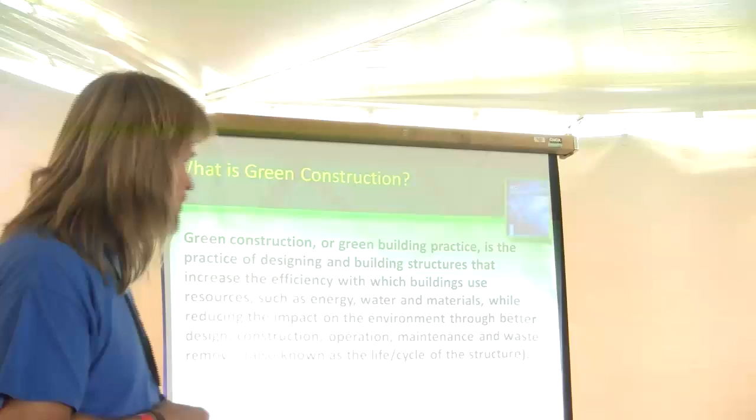Okay, and like I said, there's a handful of green building programs out there. What we're going to make reference to is the International Residential Code. The residential code is not adopted in every state in the United States, and in some states it's not adopted across the state. Like I live in Minnesota, it's adopted in Minnesota, but it's exempted in jurisdictions less than 2,500 people. Now in Wisconsin, for example, they have their homegrown building code. I believe, this is my opinion, that they'll probably be adopting the international codes in the near future.

But their provisions, when you look at them, they're really similar to what's in the IRC and the old International Building Code and Uniform Building Codes. Things just don't change that much. So if you're building locally, a lot of the same requirements.

So when people talk about building to code, is that actually building green? Building to code means that it's structurally sound, it's energy efficient, it's safe for the occupants, it's weather resistant. The things that the code has always covered. Now, does the building code cover sustainability, green construction? Some items in it might be green, but it doesn't actually have chapters referencing green or sustainability.

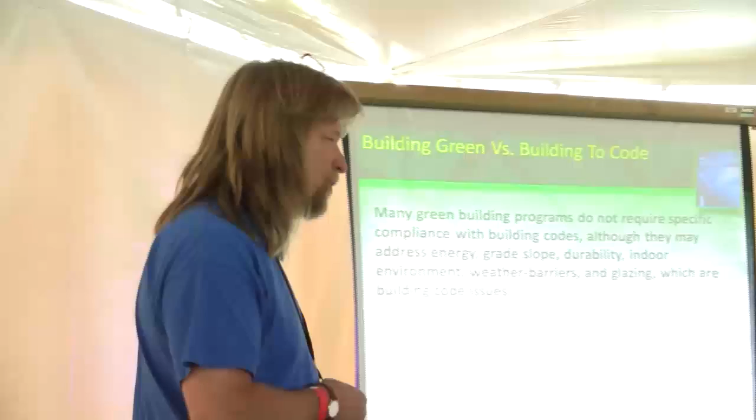But some of the green building programs, a little bit less to codes, more emphasis on durability, energy, life cycle, and we'll talk about the differences. So just because it's building green doesn't mean it's building to code. And I just mentioned this, a lot of green programs don't have specific references to code.

Okay, a lot of green building programs do base a lot of the information on particular building codes that we have in effect. That's probably good, because it's going to make it easier for the person building to that green building program to comply with the building code.

Okay, how can you use the green building program? A municipality could adopt one, or you as a homeowner, let's say you just want to build a better home with less impact on the environment. You could hire someone to design a LEED home for you, for example. That could be your choice. That's why I think a lot of us are here today, because we want to build better homes, we want to build them with less impact on the environment, more energy efficient.

A municipality could adopt it. I don't see this happening right now very often. What I have seen is in some states, they've adopted green building programs for a new development only. They'll have a development with 30 houses, and they'll say every one of these has to be a LEED Gold or a LEED whatever, and they'll make that the emphasis of the development.

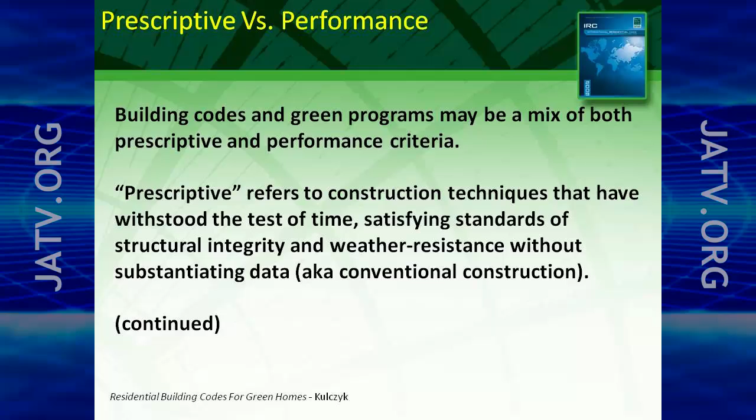I want to mention a couple of words, prescriptive and performance. Building codes are pretty much based on prescriptive criteria. Prescriptive means if you were going to build a foundation, let's say a full basement in your home, the building code's pretty much going to say if you have a certain depth of basement, maybe an 8-foot basement, and you're going to use a certain thickness of wall, like 12-inch block, and you have a certain type of soil up against it, sand or gravel or heavy clay, it's going to tell you what kind of steel you need in it. It's a prescriptive code, which makes it pretty easy if you're going to build within those parameters.

But what if you decide that on your basement, instead of building a concrete masonry or a poured concrete wall, you want to build with rammed earth or adobe or something else? Then it's kind of like, whoop, right out of the building code.

So how can we do that? Okay, so prescriptive is clear-cut limitations. I'll give you another example. If I wanted to put a house wrap on a house, whether it's felt paper or some house sheathing paper, the building code is real specific about what standard that paper should meet. And I'll talk a little bit more about that, where if you have innovative cladding materials and stuff, under prescriptive, they don't fit in so well. Okay, so how can we get those approved?

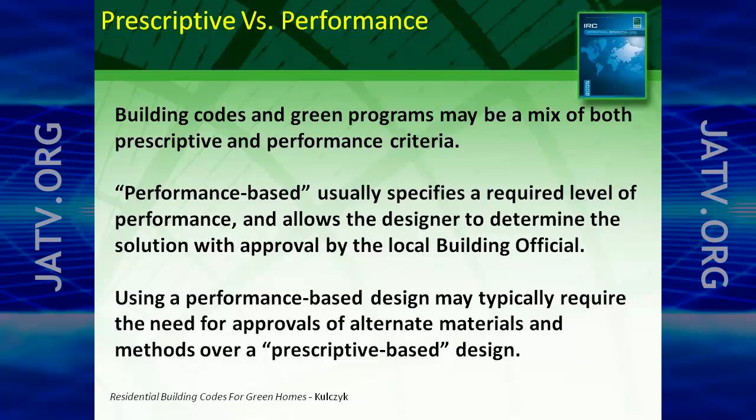So that's prescriptive. Performance-based codes is, let's say you come to somebody and say, I want to build under your code, but I want to build a geodesic dome with a glass roof, and I want to build the walls above grade out of straw bale and everything below grade out of rammed earth. They're going to look at you and go, what should we do with this? So that would be a performance-based.

Performance meaning that you need to provide some information, criteria, maybe some engineering data to the building official to show that what you're proposing meets an equivalency of what's in the code. That's performance building. In fact, same thing with energy code. Energy code is prescriptive, meaning, let's say you frame a wall with 2x6 studs in this area, it'll say 5.5 inches of fiberglass meeting an R value of 20, okay?

But a performance code would say, if you came to me with some new innovative insulation technology and you need to meet an R20, I as a building official would need to see something from you that gave me data that showed that you can meet that R20. Maybe you came to me and said, you know what, I'm gonna grind up sod and put it in this wall cavity, or maybe I'm going to make the whole wall out of sod. I would just say, do you have something that can verify that that's going to be an R value of 20?

Log home, same way. You want to build a log home? Can a log home meet the energy code? Absolutely. Can you determine the R value on a log based on R value per inch? Absolutely, you can do that. We'll talk a little bit about that. So prescriptive versus performance.

Okay, I want to just talk a little bit about the administrative authority. That means working with the building official, which sometimes may be challenging. Keep in mind, when I use the term building official, that usually means the person in charge, the administrative authority. A building inspector usually means personnel working for that person that actually does field inspections. Building inspectors, plumbing inspectors, mechanical inspectors. But the building official is the administrative authority.

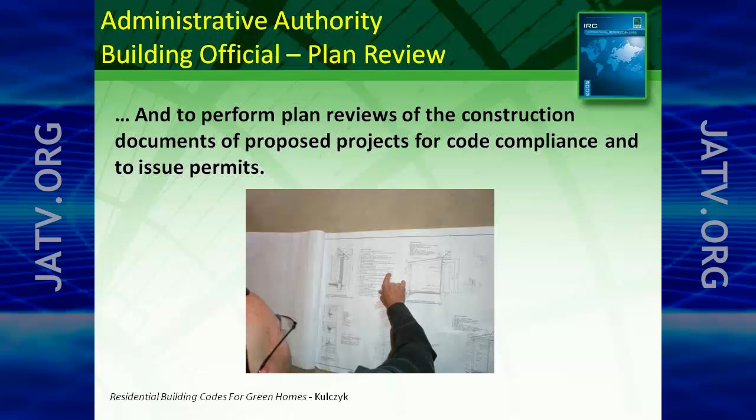So you got the building official, they hire building inspectors. They're also going to do a plan review. Keep in mind that one of the best things you can do when building a home is to give the building official the best set of plans you can and the best set of specifications you can.

Because I'll tell you, as in a past lifetime when I was a building inspector, people would walk in and say, I want to build a new house, and here's my plans, and I swear it looked like they did it during their lunch hour on paper napkins, and you go, I don't even know what you're building here. Is this a house or whatever?

And then the problem that creates is if you have very little detail on it and you actually get a building permit, or maybe you don't even get through the process, is that when you go to build it and you pull out those paper napkins and you say, well, here's what I want, and now you're building something that's really not on the plan, not enough detail, it's going to just slow that process down. And you don't want to be slowing your process down because you want to get this house built. You want to get it enclosed and weather tight and all that.

So the more detail, the better. And sometimes it sounds like a lot of work. You go, well, I just want to put this siding on. Yeah, what kind of siding? What brand? What model of siding? Can you give some siding specs to them?

Or I have some new innovative metal roof system. Contact the manufacturer of the metal roof and say, give me all the specs you have. I'm going to make it part of the submittal documents. So what if your submittal documents end up being about 100 pages? The more you can give up front, the easier it's going to make it.

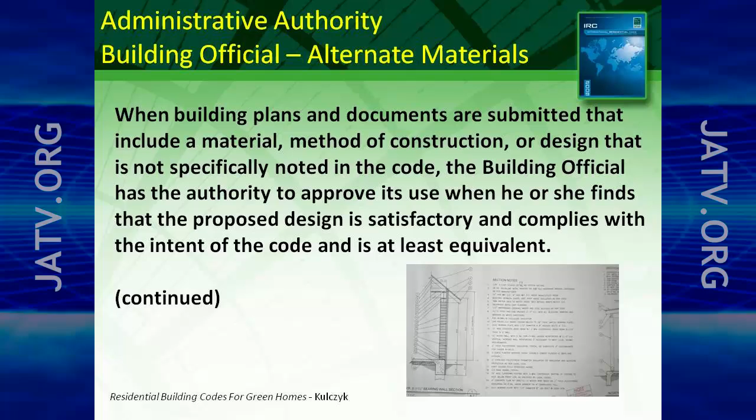Okay, alternate materials. I'm kind of talking about that. You have something that's a little different, whether it's your straw bale, rammed earth, adobe. Maybe you're building an Earthship. Anybody ever build an Earthship? I saw my first Earthship in Albuquerque a few months back, where you basically build a house out of whatever you have.

And I'm not kidding. This gentleman built a house where the foundation was out of 3,500 car tires. Laid flat, overlapped, packed with clay, some steel rods pounded in, 3 sides, south side facing toward the sun, and a metal roof system, and inside was all just clay and adobe, and it was a beautiful home.

And I actually had a chance to go through with a couple of the local state inspectors who were just kind of showing me around a little bit. And I said, so how do you approve something like that? And he goes, you know, we've seen a few of them, and the idea of car tires seems a little absurd to a lot of people. But if you've seen a few and you see how they build it and you realize that it works, it's time tested, and it's good use of car tires versus whatever else we do with them, why not?

And got a little tour in this house. It was great. It was an Earthship. And the interesting thing was I asked the guy that was building it. He was so low key, so down to earth. I said, I'm just kind of curious about how long you've been working on this. He says, well, about 15 years.

So I asked the building inspectors, how long are your permits normally good for? And he said, 6 months. And I said, so what do you do on this one? He said, you know, we just throw a note in the file every 6 months and say, Joe Blow is still working on it. And he says, we haven't even charged for an extension of the permit. This guy was just working on it.

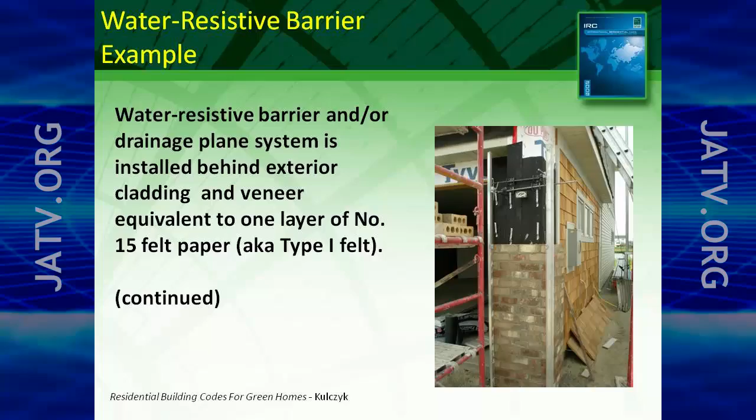Number 15 used to be called 15 pound, meaning 15 pounds per 100 square feet. They renamed it about 20 years ago to number 15 because it actually averages about 7 to 9 pounds per 100 square feet. So they use the same number, but it's not as heavy as it used to be. So that's the standard in the industry for a long time. And this standard comes in different grades depending on what you're doing. If you're using regular siding, you can put any of the 4 grades on.

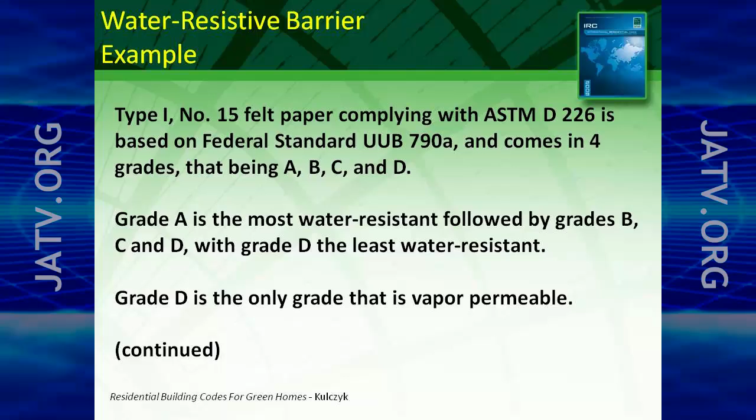If you're using stucco or adhered veneer, plastered rock, some kind of stone on it, you actually need to have a breathable or permeable paper on it, which is a grade D paper. How many people put on stuccos or have put on stuccos? Have you run into this with the permeable paper thing? I don't use any, I want the wall to breathe, so I don't use any paper of any sort. Okay, okay.

You know, the issue about breathable walls is, in the building code right now, since we had the big energy crisis, how many people remember the oil embargo of '73? I think most of us were at least alive in '73, okay? And what happened? The price of oil shot up. What else happened? In many states, they started adopting energy codes in '73. What else happened in '73?

All of a sudden, we go from 2x4 wood frame with 3.5 inches of fiberglass to sheathed foams and all kinds of other things. And since that time, we've gotten houses that were more energy efficient, more sealed up, more sealed penetrations. But if not properly constructed, we've also run into issues with moisture trapped in walls. And so it's not only building tight, but building right. So there's certain ways that you need to build. And one of the issues certainly is vapor transmission through walls, and what kind of vapor retarders, or vapor barriers, should we have.

Actually, on the walls, technically it's vapor retarders. The poly we normally put on the inside, but you also want to have one that has some ability to let moisture through it in air conditioning seasons. So it's kind of a trick. It's like, how do you have a vapor retarder on the warm side in the winter and have it more breathable in the summer or in warm, humid climates?

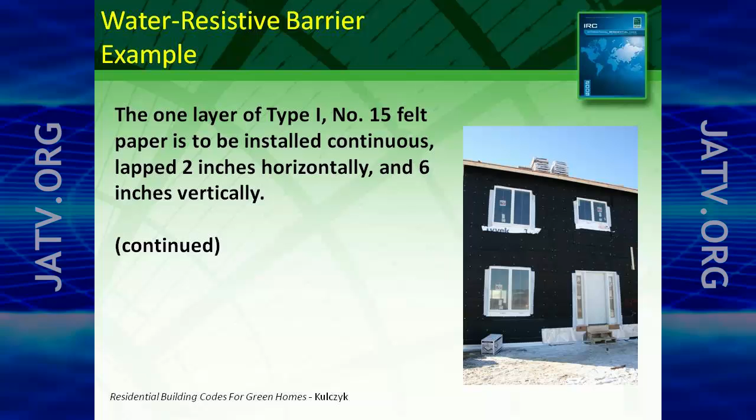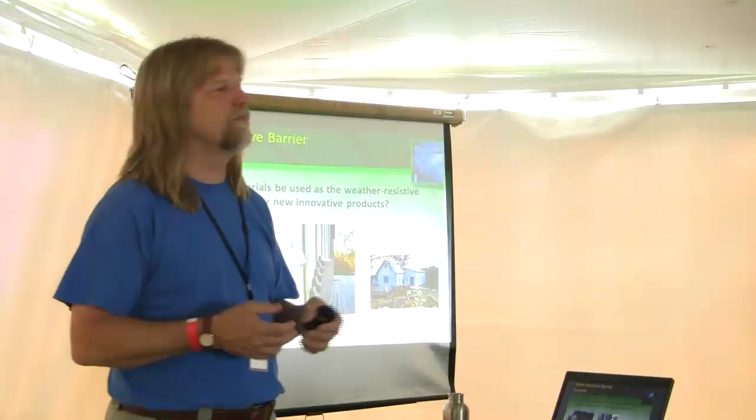All right. So normally I'd put a felt paper on the wall, and the building code's going to be specific, telling me how to put it on. Other products, we see foams, somebody mentioned Tyvek, and this is a Dow product down here. Other materials. If you come to the building official and you want to use a rigid foam on the outside, then bring the specs for the rigid foam to the building official, because they're going to need to know some things about the rigid foam itself and some of its properties, permeability and how it's supposed to be installed. The more information you can provide, the better.

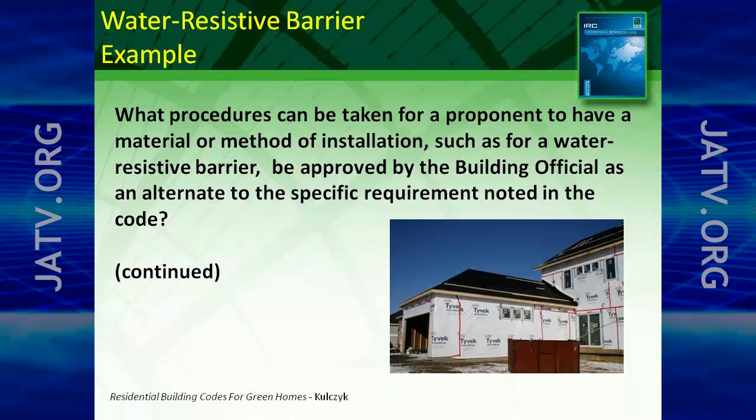So let's do this weather resistant thing. Here's some Tyvek. Okay, I want to put some Tyvek on the wall. You need to bring some data to the building official, third-party testing, maybe manufacturer specifications. I'm also going to show you one other one if you're building homes at all. The ICC that I work for has this evaluation service, which by the way is free. And they got this website, icc-es.org. They have about 22,000 evaluation reports on there.

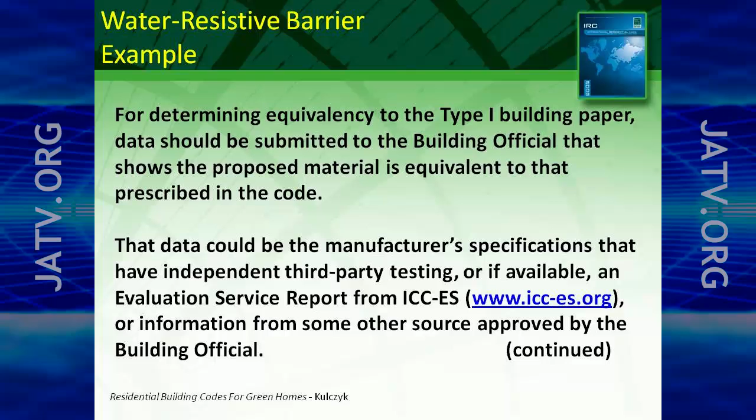And what they do is manufacturers like Tyvek and Typar will go to the ICC with their test data. The ICC evaluates it, and they basically write this evaluation saying, I'll use Tyvek, this house sheathing paper is equivalent to grade D felt paper, type 1, whatever, when installed according to the manufacturer, and they'll give some specs on it. So that way, I can go to this website, just type in Tyvek or Typar or whatever kind of foam you have and see if they have a report there. I'll just tell you that most manufacturers have them.

House sheathing papers, anchoring systems, different types of anchor straps and all that. You'll see a lot of products on here; the manufacturers go to them. And you can get these reports, you print them out, they're free. It might be 1, 2, 3 pages long. And then when you go to the building official and say, hey, I got this new anchoring system on my wall. I don't want to use 1/2-inch bolts at 6 foot on center. I want to use this really unusual little strap that has this kind of a nailing system. And they're going to go, I haven't seen that before. And you can go, here's the ICC ES report if that'll help you. And they have conditions of use.

To tell you the truth, this is one of the cheapest, easiest things that'll help make your life easier if you're building for yourself or building homes in general, these reports. Just look them up, it's a good thing. Yes, sir?

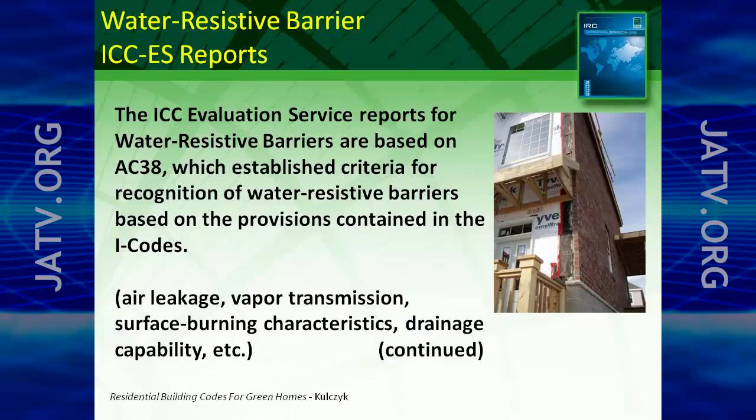So this is a report like on house sheathing, and they're going to evaluate certain parts of that, vapor transmission, air barrier, and check it to a standard, give them a report. And that's going to happen with a lot of products. And this is just kind of what these evaluation reports look like. They have a ton of information. The best part is it's free. And the greenest part is you don't even have to print it. You can read it right on the screen.

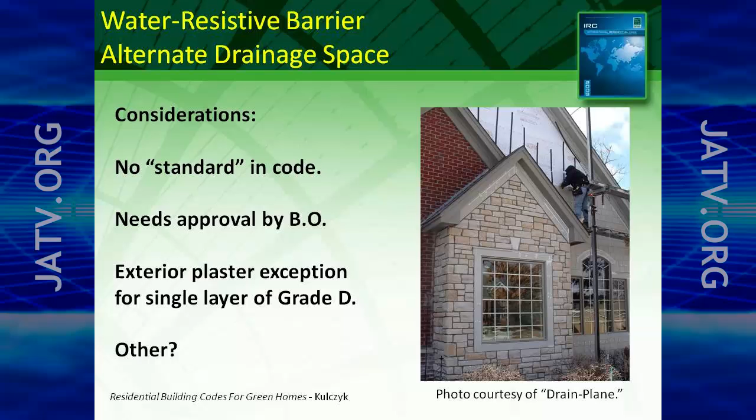No, they're very short, but if you're doing exterior plaster, stucco, you're always using a grade D paper, by the way. It's the only one that's vapor permeable. Okay, what if you're using some other kind of a system? You want to have a breathable something behind it, a little airspace behind your exterior cladding and stuff. Bring as much information to the building official as possible. Show them what you're planning on doing.

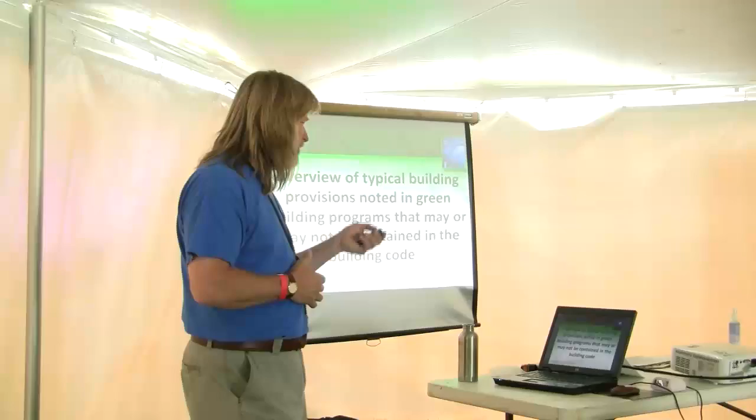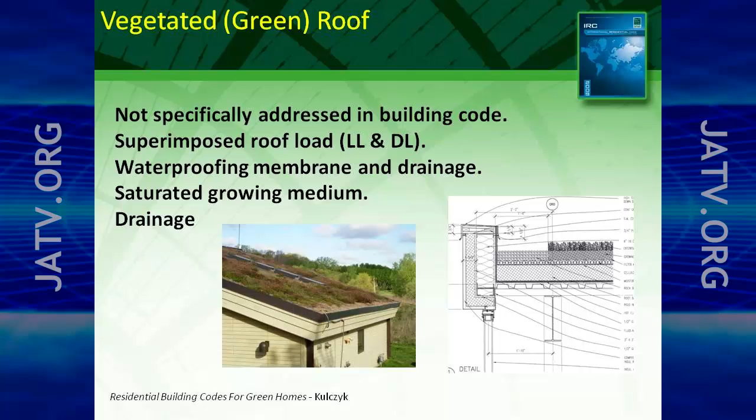Okay, let's talk about some particular kind of things, and we'll chat a few seconds about each, and we'll talk about the issues with them. So these are not, or may not be, typically in the building code. Vegetated green roofs. When you're putting on a green roof, say you're going to go to some building inspector, some department, and say, I want to put on a green roof, I want to put sod, or I want to have trees growing, shrubbery, and all that. They're going to have some issues with that, especially if they haven't seen it before. So the best thing to do is to look at those kind of things that are the issues.

If you're going to put a vegetated roof on, first off, I want to know what it's going to weigh. I want to know that structurally it's going to handle it. Okay, let's get past the first hurdle. Determine what that is actually going to weigh per square foot, dead load, and then figure out some live load for snow. Because I heard in this part of the country it snows, and we have some snow issues.

So depending on what kind of a system you're building, maybe it's an open web floor truss or whatever for your roof, get some specs from the manufacturer. If they're engineered systems, it'll be a lot easier. If you're going to stick frame it, you're probably going to need to have a lot more data. When I say stick frame, meaning solid sawn lumber, something other than engineered trusses. So structural integrity.

What else on a roof is pretty typical? It rains, it snows, we want to make sure it drains. We don't want to have that water sitting up there. So give a lot of details about the drainage. Do you have drainage membranes, mats? Do you have scuppers? How are you going to drain this? What are other kind of things?

Those are really the key things. In some areas of the country, fire code is actually an issue, but you'll probably run into that more with commercial structures with green roofs.

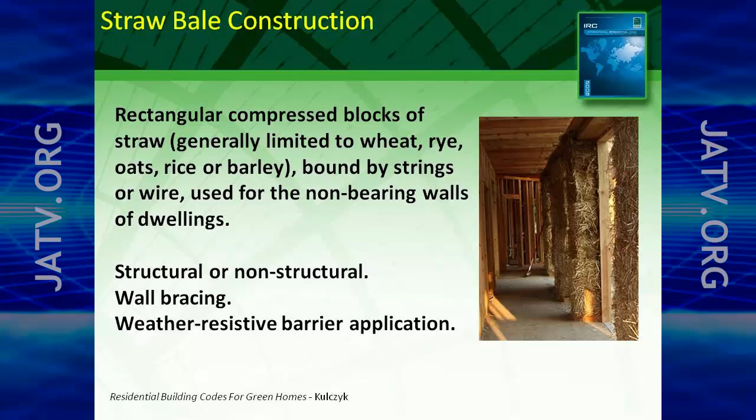Okay, straw bale. You're going to come to somebody with straw bale. Most straw bale homes, the walls are straw bale, but typically they're post and beam construction. In other words, you have framing in between that will serve as your structural system. But you also have provisions in the code for wall bracing. In other words, if you put a building up, whether it's a tent or whatever, in a high wind it's going to have a tendency to move a little bit.

So if you have a straw bale and you don't have a sheathed wall or let-in bracing, what are you going to do to it that will provide that lateral bracing? In most cases, a straw bale with the mesh and the cement coat on it, or whatever kind of coat you're going to put on it, is probably going to provide that bracing anyway. What other issues might you have with straw bale? How about the weather-resistive exterior? Provide some details to the building official.

If the straw bales are non-bearing, it's going to be a lot easier. If you intend to build some kind of a wall system, whether it's straw bale or something similar, or cob or whatever, that's going to be a bearing system, you're probably going to have to show a lot more detail. It's carrying the load of the wall above. That's a bearing system. So show them how you're going to comply with that. Structural is a big issue. Weather resistance, big issue. Water resistance.

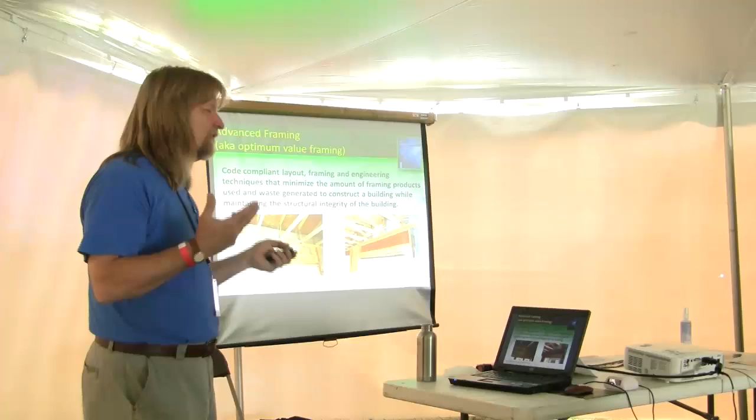Does that create problems with the wall itself? Probably not. You still need to brace the wall, sheathe it, or if you're going to go with foam, some kind of let-in bracing, metal bracing, something to resist the wind loading. So optimum value engineering is just using less wood, still meeting the building code.

Yes, sir. On that wind loading, are they starting to get it into the code more about reaching the hurricane straps on down to the bottom? Is that happening or no? We probably won't see hurricane straps. I think what you're referring to is from the top down. Let's say you build a 1-story Rambler style home. You got hurricane clips from the trusses to the plate, and then straps connecting the rafters to the wall, not just the plate, and then down at the rim area, and then down to the foundation.

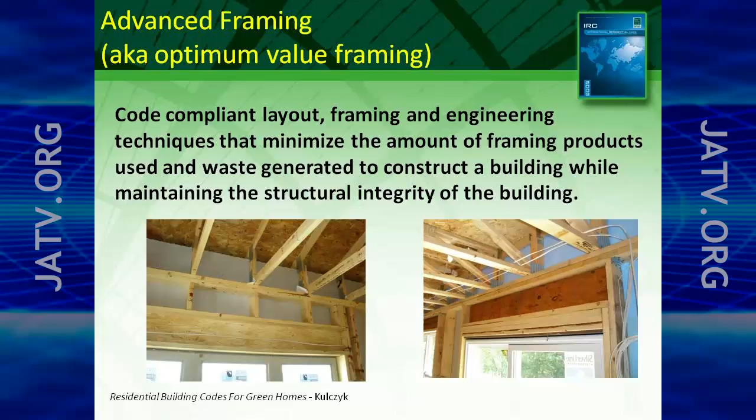I don't think we're going to see that in this area of the country, only because right now it's pretty much 90-mile-per-hour wind, and you can do that with nailing. When you start reaching about 135 or getting out on the Atlantic coast down to Florida with 155, you're going to have straps all the way down. If I were to build a house from scratch today, I'd have straps all the way down. You know what? It's pretty cheap insurance. I would certainly do that.

What about the vapor drive on those straps, since they're metal? Are there some condensation issues there? You know, I just haven't seen that because of the amount, and the fact is they're buried between gypsum and wood or studs and sheathing. I just haven't seen it.

Where I have seen issues with condensation is people that have decided to go to metal studs to save wood and drawing the moisture through. But if you're going to metal studs, then you're going to need continuous sheathing on the outside for the thermal break. And with metal studs, I'll put it this way, you need to do a lot more to prevent moisture issues and condensation issues within a wall.

Plus the carbon trail on metal studs is about 25 times as much as the carbon trail on wood framing. And by the way, we're planting more trees in North America right now than we're cutting down. Okay, you could use factory assembled panels.

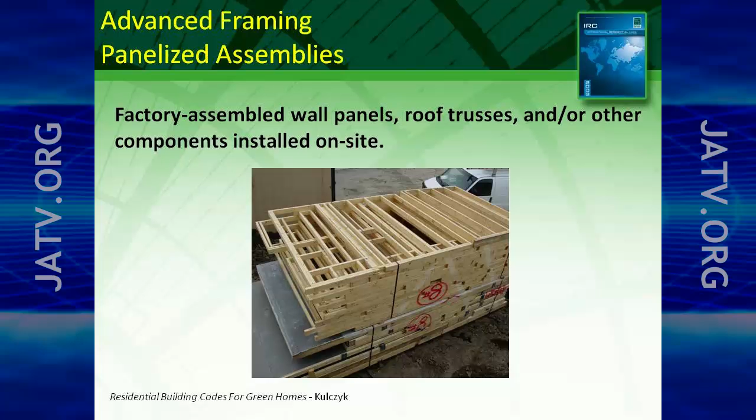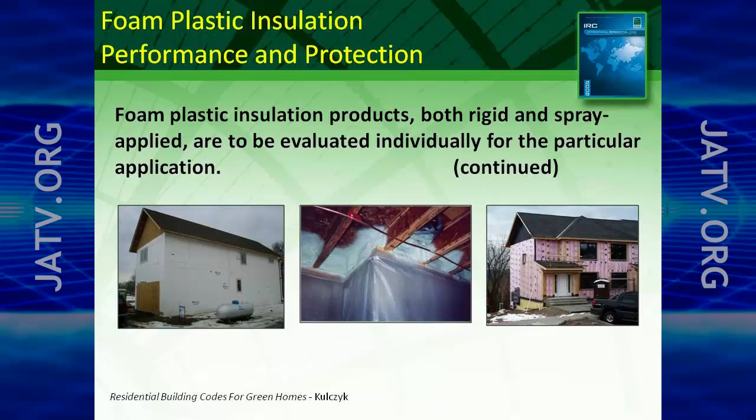Okay, foam plastics, a couple quick things. If you're going to use foam plastic, whether it's rigid, spray applied, closed cell, open cell, all the specs are different. My best advice, get manufacturer specifications, because they talk about a lot of things. Permeability, R value, density, the compression on it, vapor transmission, and thermal barrier.

If you build a foam wall, you're going to need a 15-minute thermal barrier on the house. You're going to need 15 minutes of separation between the foam and the interior environment, no matter what kind of foam you're using. There's only one exception that I know, and that's actually for a foam sheathing called Thermax, but that's another story. Okay. What would you use?

Half-inch sheetrock would be a 15-minute thermal barrier, or something like that. Also, 3/4-inch plywood is a 15-minute thermal barrier, which sounds silly, but it is. So something to separate from the interior. Okay.

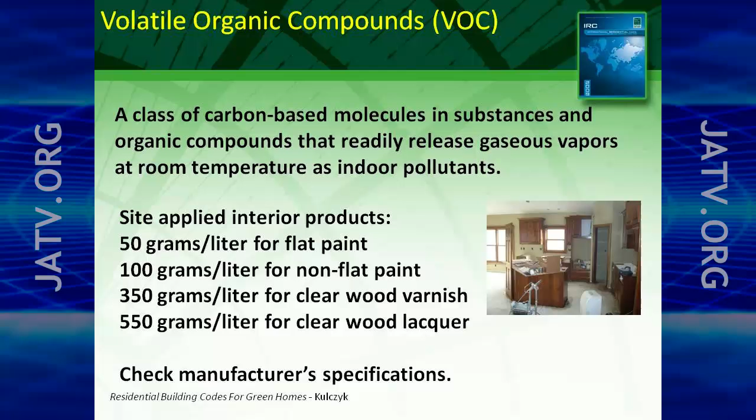Volatile organic compounds, low VOC paints are going to be in a lot of green building programs. A lot of manufacturers are listing these now. If you're using bio-based material, engineered products, engineered studs, get the specs from the manufacturer. Vapor retarders, we're all kind of used to poly, but there's a lot of different vapor retarders out there now.

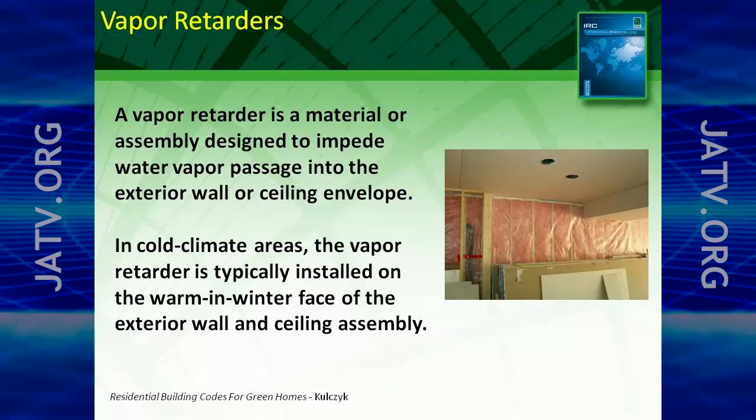Gentleman out here mentioned, can we use paint? Absolutely. You can use paints, you can use polys, there's other products you can use. Interior foam sheathing would also work as a vapor retarder.

Air barriers, you want to seal up the interior so you don't have moisture movement into the wall. Does the code tell you how to do that? Not really, it just says seal them up. What kind of material are you going to use? Tape, caulk? Just put a note on the plan how you're going to do that.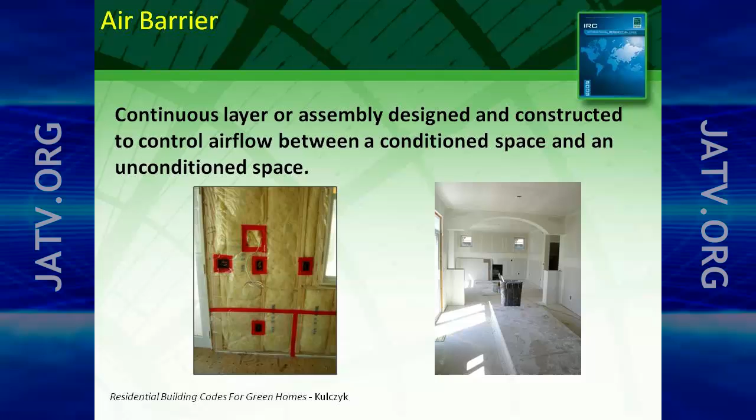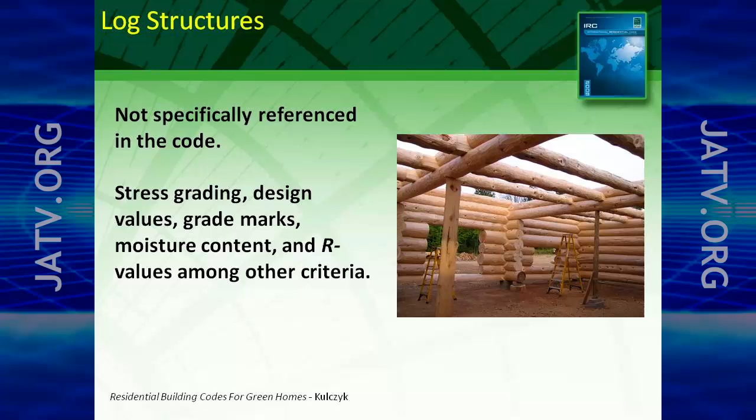Indigenous materials just means you're using materials that were manufactured within 500 miles. Maybe it's the dirt in the ground, maybe it's log homes, log structures. I want to mention one thing about log structures. If you're building log homes, there's a new ICC standard for log homes that might make your job a lot easier. It's called ICC 400. It talks about everything related to the logs themselves, even energy related.

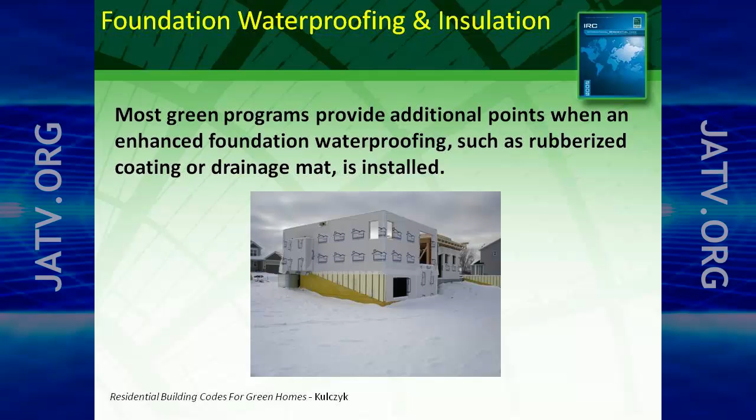If you're going to waterproof your foundations, the building code's not really specific about types of waterproofing, but there's a lot out there. Bring those kind of things to the building official and say, I'm going to use this gray stuff, we're going to spray it on so thick, can you approve this? It's an alternative material. Here's a rammed earth. I mentioned that earlier.

Can we reuse materials? There's some limits on what you can reuse. You can actually reuse framing. You can reuse the whole house. Okay. Earthship, this is the one with the car tires I mentioned earlier.

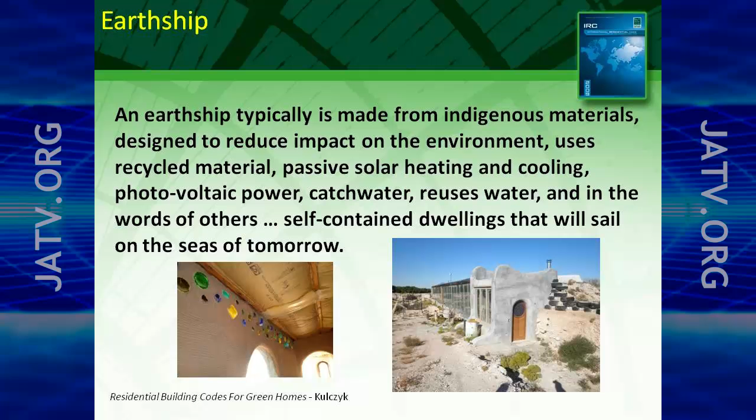Energy, the energy code, basically more energy savings, and if you have different kinds of materials you want to do that with, whether it's some kind of foam or something, bring that to the building official. Talked about performance. This is adobe. I don't think we see much adobe in the cities.

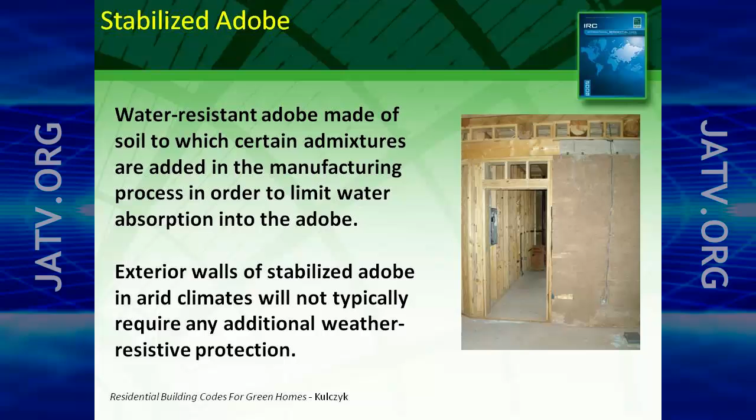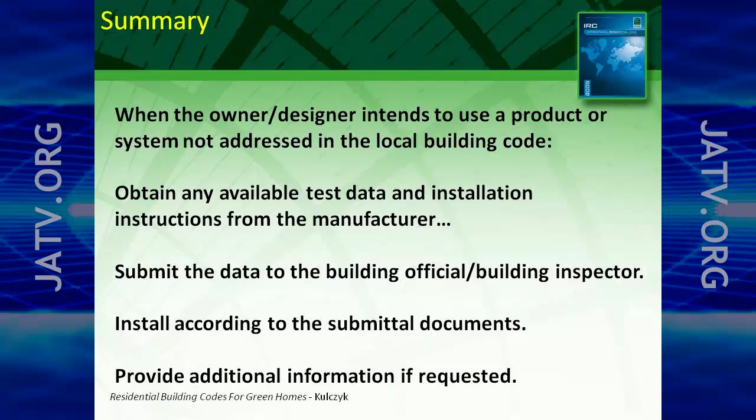Summary. If you're going to propose something that's not in the code, as much data as possible for the building official will make your job a lot easier. Test data, and try to install it according to the way it was proposed in the submittal documents. If you have some information that you followed up after you got the permit, give it to the building official. If you're going to make changes, contact the building official before you do it.